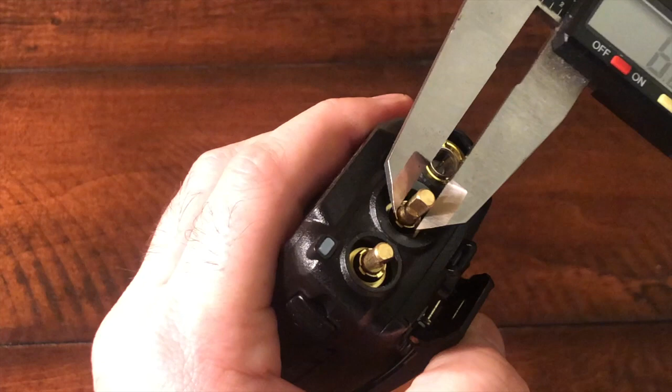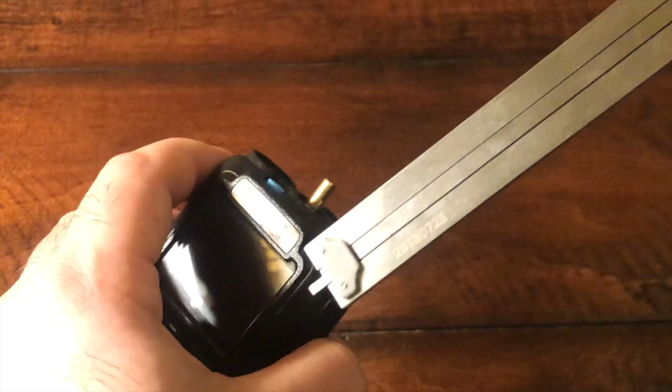Alright, so we're going to build a new knob for the Anytone 868/878. This is meant more as a walkthrough rather than a tutorial, so I might be skipping some steps like showing you how to measure things, but I'm pretty sure everyone can figure that out. Get a good caliper — you don't have to spend a ridiculous amount of money on it. A $30-$40 one from Amazon will be fine, given that most 3D printers aren't that accurate. In fact, you're probably going to need to make adjustments to your model to accommodate inaccuracies of the 3D print later on, so be prepared to print multiple copies once you get there. Take the measurements, write everything down, and we'll see you over in Fusion 360.

Now that we're in Fusion 360, we're going to create a sketch and copy all the measurements we took down earlier. We'll draw a circle initially for the width of the shaft, which I believe is 5 millimeters. Zoom into it.

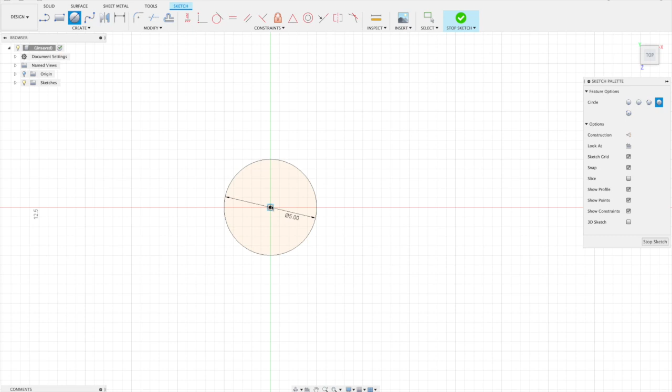After this, we're going to have the platform that sits on the nut, and then beyond that we'll do the little skirt that fits in the hole. So there's that 8 millimeter that's going to be sitting on a nut, and outside of this we're going to do one at 11 millimeters, which will give us the little ring that fits into the hole so you don't see the nut and whatnot.

One more thing we're going to do is draw a line across the whole object, kind of to have as an index. Since we know it's a D shaft, and that is about 4 millimeters in, we're going to drop a little line right there, then move the mouse up and draw a tangent.

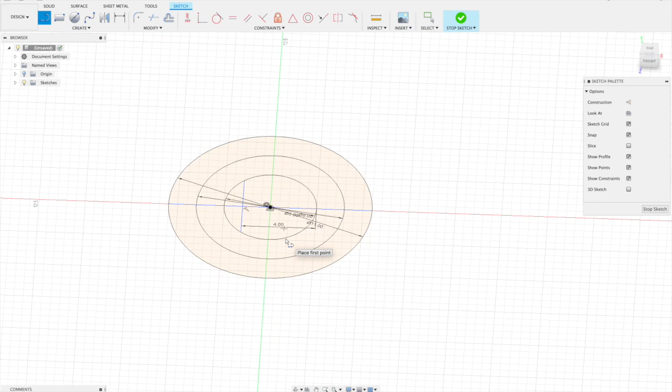By the way, cool thing with Fusion is that when you type in a dimension in the tool, it'll lock into it. So if you want a 3 millimeter line, you just type in 3 and hit tab, and it'll stay at 3 millimeters.

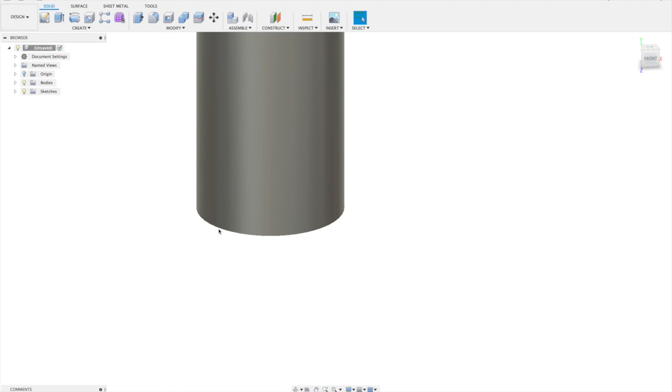At this point we're going to extrude this up. Mind you, this is from the nut level, so we're going to extrude this up 15 millimeters. I expect there to be about a 2 millimeter gap to clear the plastic, and then the button starts beyond that. So we're going to select the D section of the shaft, that little stopper, and extrude that up the full length, 15 millimeters.

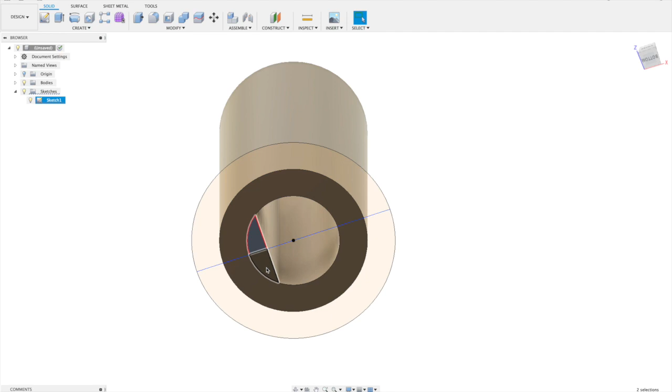We're going to select it again, and this time cut and remove material — this is for the part of the shaft that's circular versus the part with the little cut in it. So we're going to go up about 6 millimeters for this one, and that will lock into the area that is circular in the shaft. Then the D obviously fits on top.

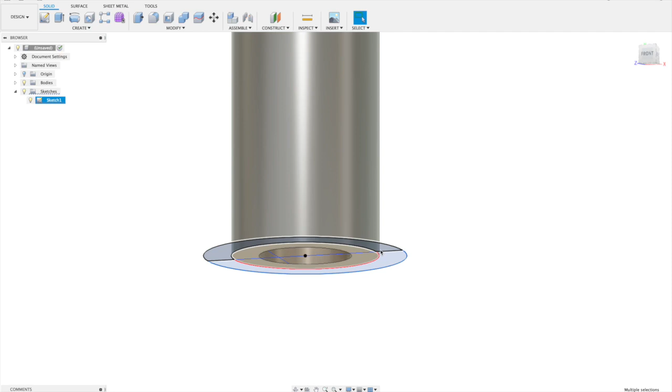Now we're going to drop the little skirt area down. First we're going to move it down about 3 millimeters, and then extend the top section up to the top — there's the 3 millimeters.

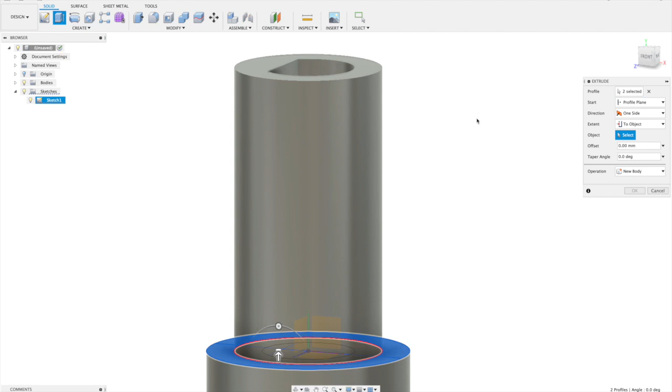On this one, instead of having it be a unit distance, we're going to have it be 'to object' for the extent, and we'll lock it to the top of that inner section. That way, if you decide to resize it later, it's not going to be two separate components — just a tidier way of doing it.

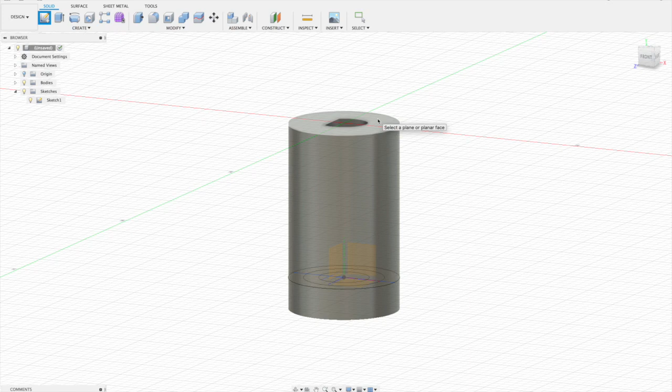So now that we have the core section, we're going to build the rest of the knob around it. Let's create a new sketch, and this time select the top of the core area. We'll start by dropping a circle right on top, and make this about 14 millimeters, because I think that's a pretty good width for a knob. 15, 14... yeah, 14 sounds good.

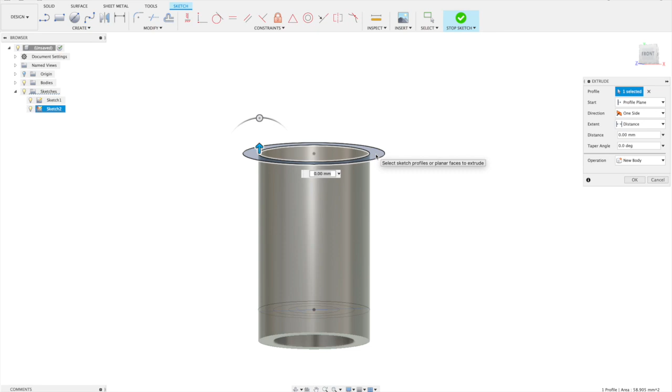Again, go back to your extrude tool and extrude this down for however tall you want the button, or knob, to be. Let's go with... that's too short. There we go, that sounds about right. By the way, I'm kind of winging this — the button I initially designed was way more obsessive, but I'm just showing you guys the procedure and how I got to it.

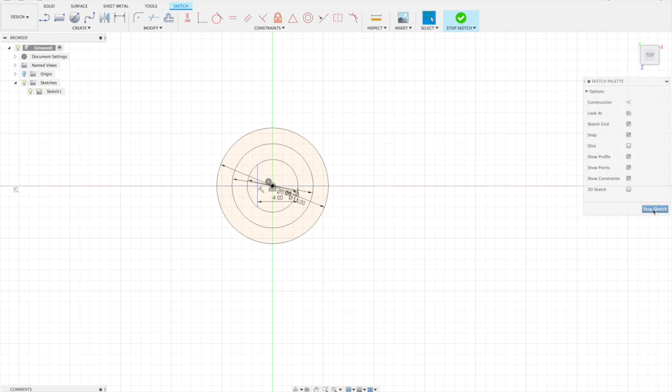So now with this face there, what I want to do is have some way of drawing on that circular face. Whoops, clicked on the wrong one. So I'm going to go to the sketch we had for the top section — remember, you can have sketches on multiple planes and multiple surfaces. I'm going to drop a little anchor line here, right to that tangent point.

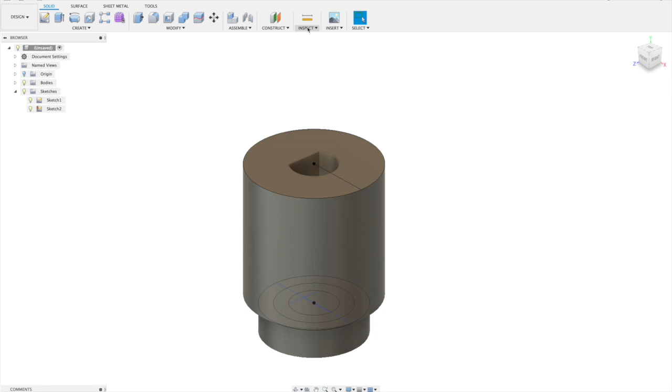What we're going to do here is create a plane against that face that I can draw on. You'll see why I'm doing that. So we're going to select a tangent at a point, and there's a point that we just created. Now we have a plane that is against that knob's surface.

So if you create a sketch, and this time click on that particular plane, now we are drawing right against that surface, or at least that tangent point on that surface.

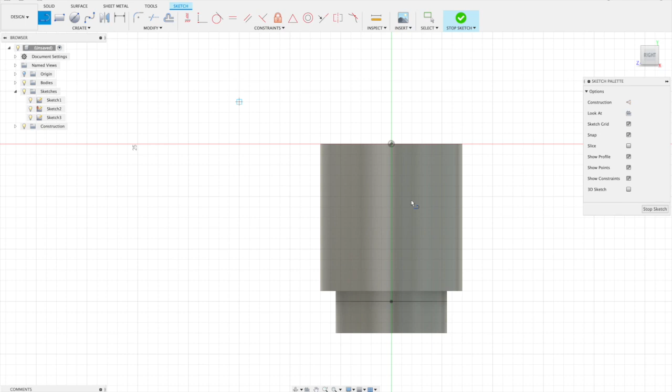We're going to go ahead and draw a rectangle right in the middle. Oh wait, I need to add a line here so I know where the middle part is. So we're going to click the top and the bottom. Remember, this is the point of contact, that tangent point, so you can click and snap to it. We're selecting the rectangle tool that allows you to select the middle and expand out from there versus the bottom corner and top corner.

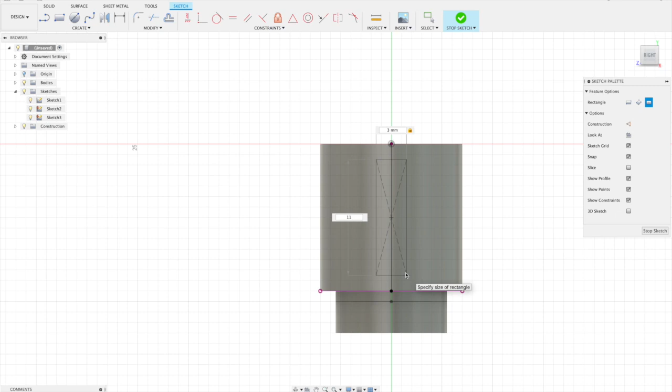So like a little indentation here for your finger. We'll do like 10, 11 millimeters by about 3 millimeters. Yeah, that looks about right, just kind of eyeballing it. Again, go with whatever you guys feel like. If you want bigger indents, smaller indents, whatever works for you here is nice.

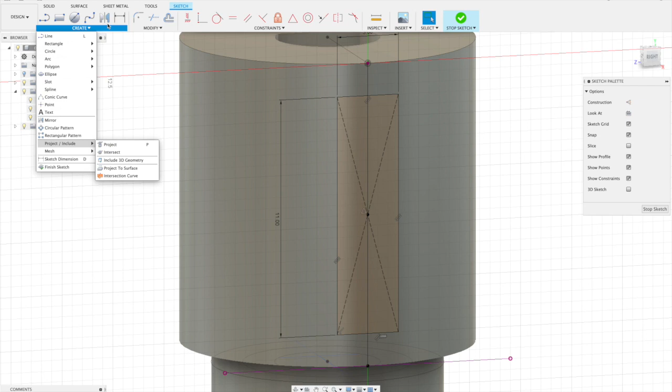Alright, next thing you're going to do is another extrusion, except this time it's going to be a cut. We'll select both halves since we had that bisection happening, and we're going to go into the side of the knob by about 1 millimeter. You can see the cut in red indicated there. We're going to OK that.

Sorry about the emails coming in. We have a rainstorm in Southern California, so I'm getting a lot of Red Cross emails.

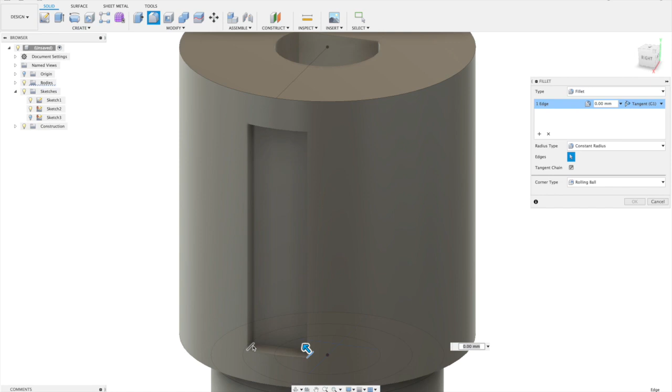Go ahead with the fillet tool, rotate and select the little edges so we can round them out. There might be a shortcut to doing this, but this is the way I'm doing it. Click on the arrow and drag until you have the edges rounded out, and this one's about nice, so we'll stick there. Again, it doesn't have to be accurate, whatever feels good on that one.

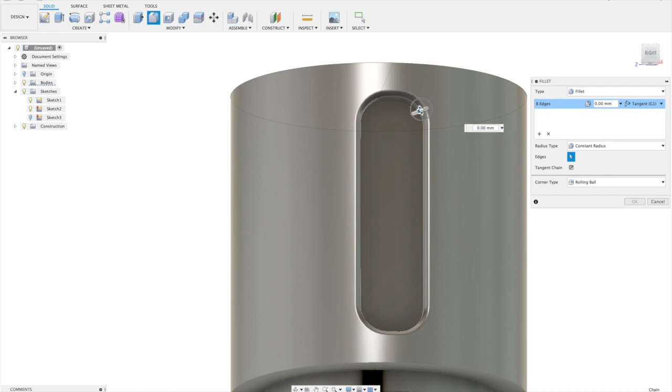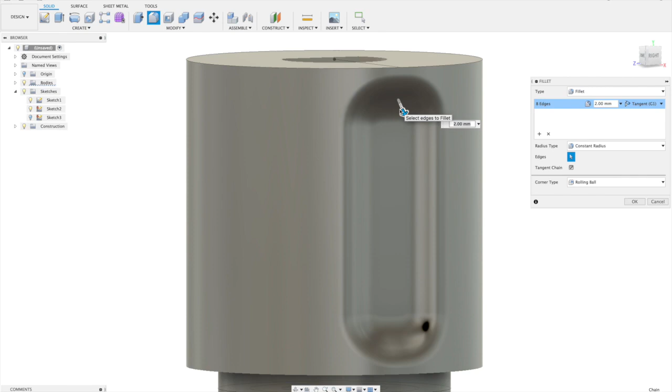We're going to do another fillet here and round out the top corner so the finger can get in there. Again, feel free to eyeball it, for the outer edge, and we'll do another fillet for the inner edge. Make sure that the tangent chain is clicked on so it doesn't just try to do a fillet on that one section. It kind of all joins whatever's attached to it together. And there we go, we got ourselves a little area where your finger will grip into.

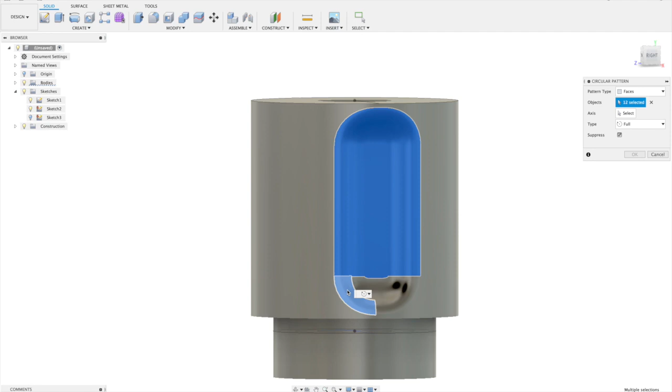And here's a cool one, the pattern fill circle, or circular pattern. This is a cool concept. You first start off with selecting the objects that you want to replicate, and as you can see, I'm selecting not only the center sections, but also the edges. Okay, drag and drop doesn't work. Shift click across all of these until you have the whole thing figured out.

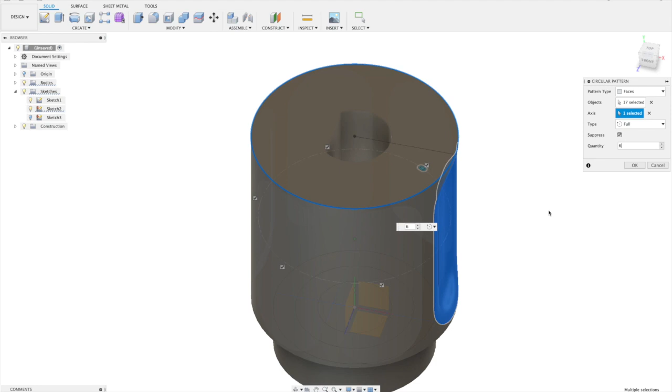Then switch over to the axis option and select one of the circular areas. Now you can see a shadow forming of this replicating around that axis. You can increase the quantity to however many little ridges you want on the knob. I think 6 looks about right, doesn't seem too crowded or sparse. Click OK, this will take a few seconds while it replicates. And there you go, there is your little knobbies for the button.

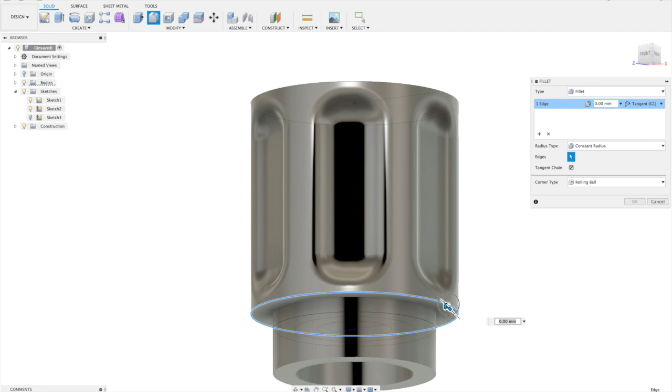Or I keep saying button, I meant knob. We'll do a fillet on the bottom of the knob, 1 millimeter I think should be enough. Half millimeter, I think that looks better. Now the top right now you have obviously a hole, which doesn't make a lot of sense. So we're going to shift click and select all the individual components and extrude that up a few millimeters, again with the E command.

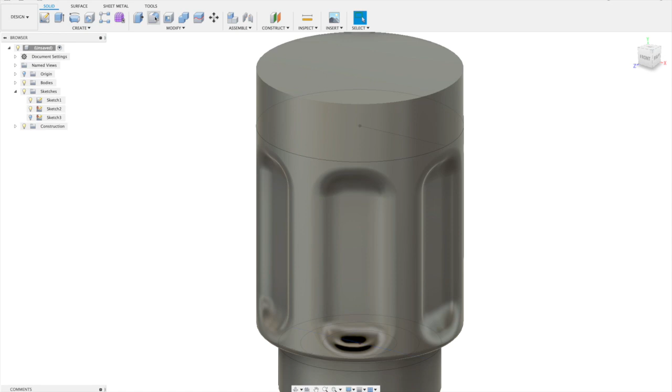And there's a little top, and again we're going to apply another fillet to round this out. Let's see, right about there, that looks right.

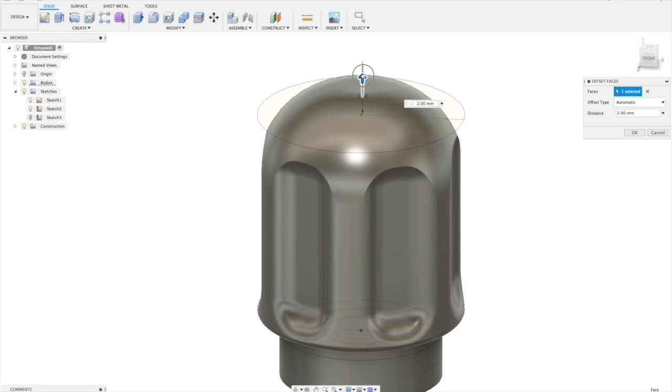This button seems a little bit tall with that little top hat, so we're going to hit the Q button, which is a push-pull tool. We're going to select that top section and bring this down a millimeter or two. Let's see what looks right. Let's see, 2 millimeters, does that look right? Yeah, that looks about right to me. Maybe 1 mil, around there. Yeah, that looks about right to me.

And there you go, you got yourself your knob. There's a little D-shaft area that fits in, and voila. Next comes the 3D printing. Forgot to mention this part on the previous section.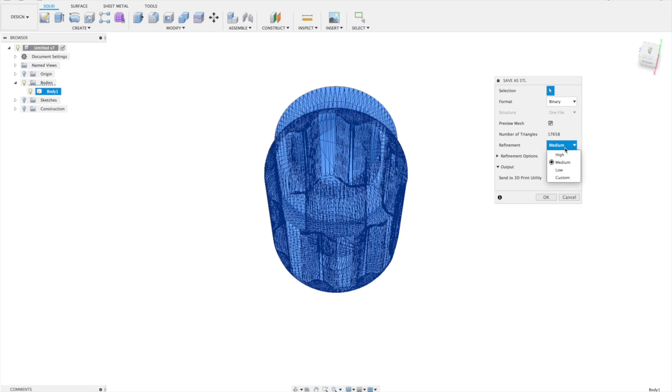Once you have your model built, what you want to do is right-click on the body, click on Save as STL, and you will see a drop-down thing. For refinement, just pick whatever makes sense. I just go with high because even at this many triangles, 50,000 is not out of control. Click on OK and save the file, and you're good to go from there.

Once you have created your STL file, bring that into whatever slicer you have for your 3D printer. We're not going to go into details on how to 3D print since there are too many variables and plenty of tutorials out there already. But for this particular knob, on your print settings, make sure your fill density is 100%.

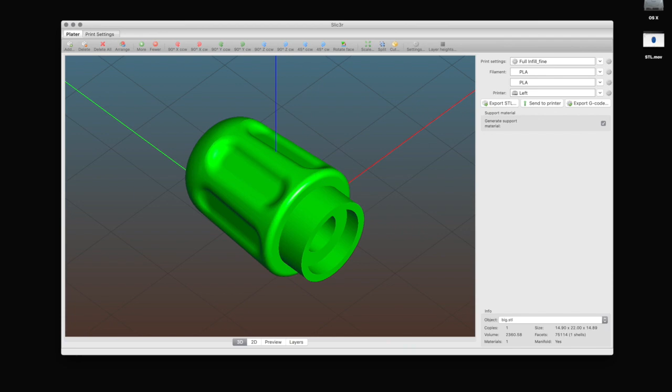Send it off to your printer. This one I'm using something called Octopi, an open source Raspberry Pi installation that connects to my 7-year-old MakerBot and prints from there. We're going to print it, and you'll see a quick time lapse, then go into post-processing, and hopefully you'll have a button in about an hour or two.

Alright, time for the time lapse with obnoxious music. Okay, that's enough.

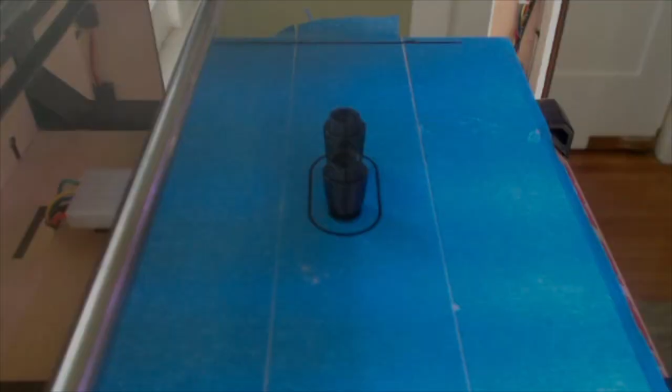So you printed your part and realize it's either too tight or too loose. The good part is now you have something to practice your painting on, but you have to adjust the piece to make sure it works. With Fusion 360, it's simple: select the face you want to edit, hit the Q button, and push or pull that surface. Decrease it with a positive value, like 0.1 or 0.3 millimeters, or use a negative value if you want it bigger, then print the part again.

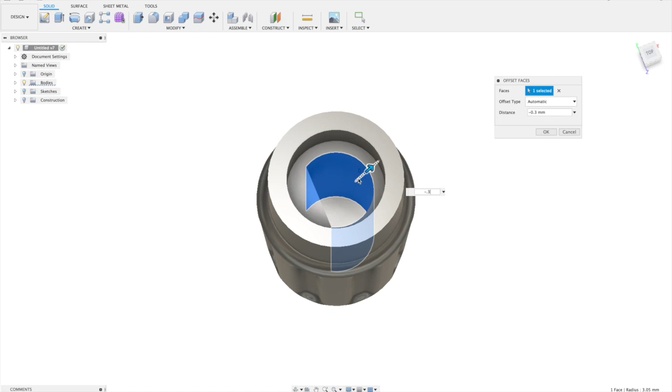Now we have our 3D printed part, and we're going to do some post-processing before priming and sanding. Like most 3D prints, you'll see some lines, and since this is an old printer, there's going to be a lot of it. Get some water and 400 grit sandpaper - I wet sand because it makes the sandpaper last a lot longer. Go in there and try to remove all the little protrusions and stuff.

The filler primer will be able to fill in the little holes and gaps between the layers, but it's not going to do anything with something protruding outward. So don't be too gingerly, just go in there and smooth things out.

For this particular knob, after priming, I'm going to use Plasti Dip spray, which should leave the knob with a tackier surface, making it easier to grip. Once you're done sanding, stick it on something you can use to paint. I'm using a chopstick from a takeout, and I'll use that to hold and rotate it while applying the primer as well as the spray paint later on. Next up, time for priming.

Remember to wear gloves, work in a nice ventilated area, and start your spray of the primer before you hit the product, spraying continually through it. Be prepared to do about 5-6 layers with about 10 minutes between each layer to let it dry a little bit. Now to sanding.

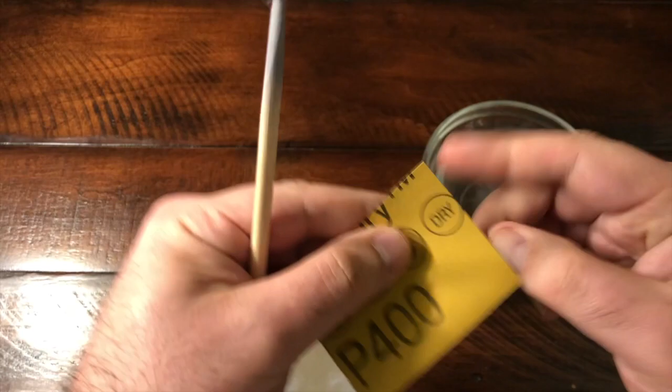After letting the primer dry for about 2 or 3 hours, you can start sanding. I use these 3M sanding sponges, which are 800 grit, as well as normal sandpaper at 400 grit. As usual, I'll use a wet sanding technique and get into the details pretty meticulously.

With glossy paint, any imperfections will very easily show. With matte or satin paint, it's not going to be as apparent. Be prepared to spend about 10 or 15 minutes on each knob to get a nice smooth finish. Once you're finished with the wet sanding, let the part dry for a few hours, and we can move on to the final step, which is the plastic coat spray.

The final step is applying the plastic coat spray. Just like the primer, start the spray pattern before you hit the product, go across the product the entire way, and apply nice thin even coats while rotating the product. That's where the chopstick comes in very handy.

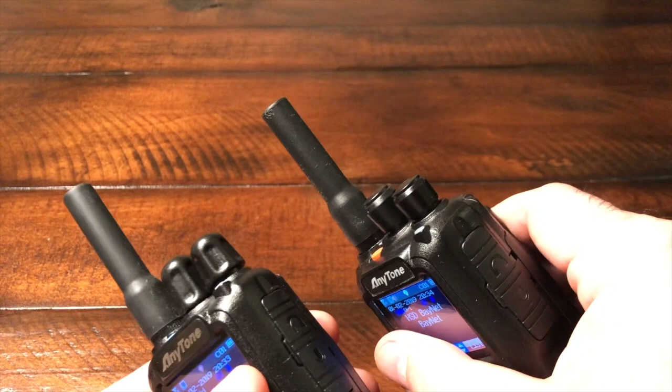For the plastic coat, it's recommended you get about 3 coats in. Right now you're seeing me apply the second coat, and after everything is dried, about 2 hours or so, you'll be ready to put it on your radio. There we go - there's the 868 with the old knobs, and here's the 878 with the new knobs. I would say those turned out pretty okay. Hopefully you guys will have some good luck as well. Thanks for watching.